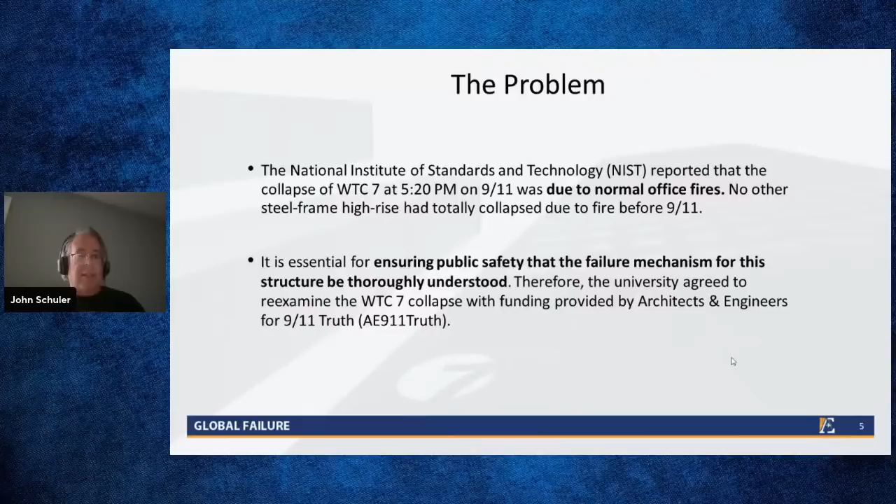So again, NIST reported WTC 7 collapsed due to normal office fires. This has never happened before in history. It's essential for public safety, as we engineers know, that this failure of this structure be thoroughly understood. Therefore, the university agreed to do this study funded by AE 911, but it's a complete, transparent university study.

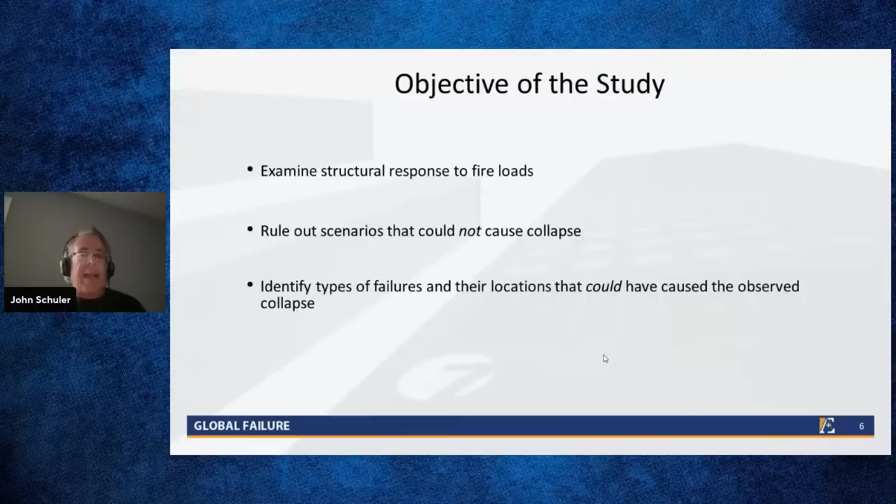Next please. So the 3 objectives of the study were to examine the structural response to fire loads, to rule out any scenarios that could not have caused the collapse, and to identify types of failures and their locations that could have caused the observed collapse. Next please.

So this study took 3 approaches. One, it simulated local structural responses to fire loading on floors 13 and below, where the fires were reported. Then we also looked at the collapse initiation hypothesis developed by NIST, this progressive collapse mechanism, as well as several others advanced by private engineering firms post 9/11.

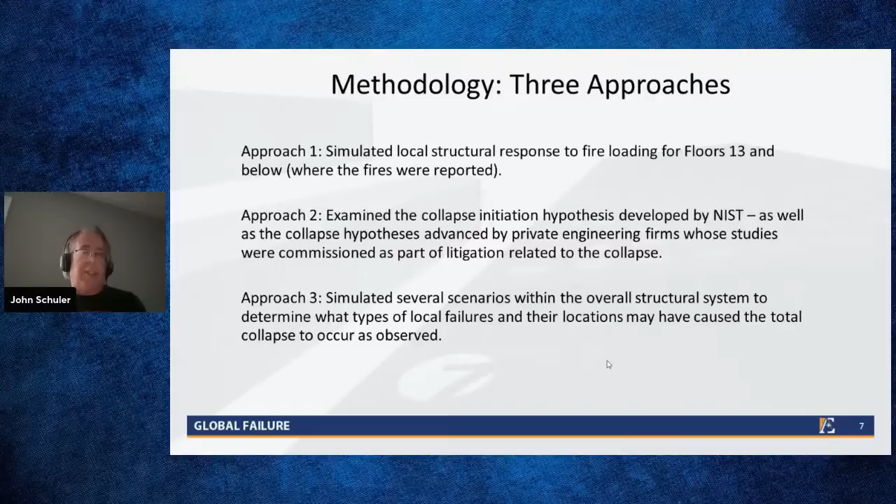And then the UAF study also looked at several simulated scenarios that would work with the recorded video footage to see if that would point to anything. Next slide please. And that's what we'll go through tonight.

So after 9/11, FEMA issued a report in May of 2002. Of course, the Federal Emergency Management Agency authored a report on World Trade Center 7. Then NIST completed its report in November of 2008.

Then, as a result of lawsuits, there were two other reports. So sometime around 2010, I guess, Con Edison sued the property owner of the World Trade Center complex, saying that our substation was destroyed because your building was faulty in design or construction. They went to court, and that was Silverstein Properties that they sued. And of course, in court, like many times, each side, the plaintiff and the defendant, each had their own engineering expert witness. For the plaintiffs, it was Arup Group, and for the defendants, it was Weidlinger Associates.

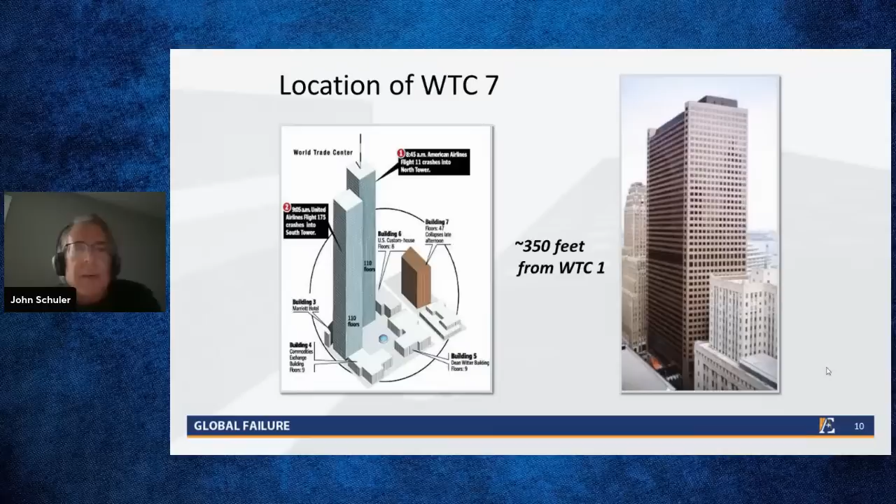Here's the location of World Trade Center 7. We all know there were the two twin towers. The World Trade Center was a complex of 7 buildings. 1 and 2 were the trade centers, 3 was a small Marriott hotel. Then there were buildings 4, 5, and 6, the other low buildings in the picture on the left. World Trade Center 7 was across the street, the furthest one away, and you can see a picture of it on the right-hand side.

World Trade Centers 1 and 2 were completed around 1973. World Trade Center 7 was not completed until 1984, so at the time of 9/11, it was only 17 years old—a new, beautiful building. It was 47 stories tall, and would have been the tallest building in 28 states, even though it looks small in Lower Manhattan. It was an irregular trapezoid in plan, 610 feet tall, 47 stories. The gross floor area was about 2 million square feet, about 75% of the Empire State Building, and it was built over and through an existing Con Ed substation.

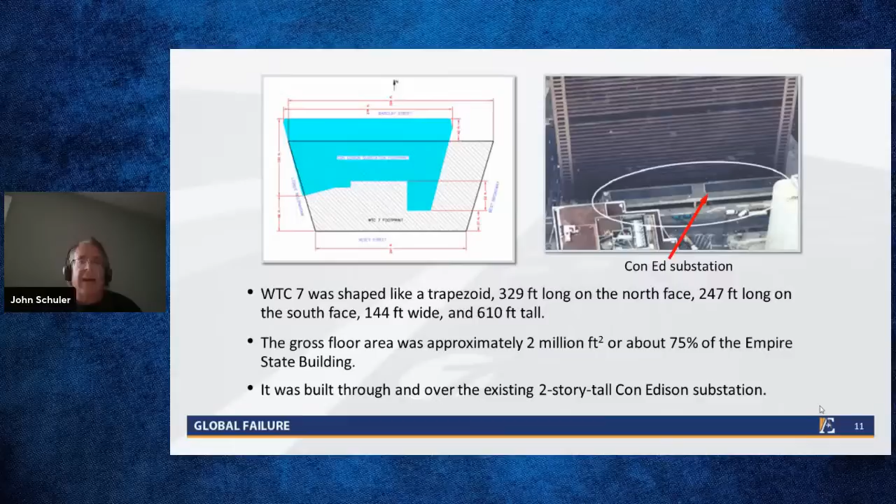Again, 47 stories, each floor was 1 acre in area. It housed a number of government offices for the federal government, I believe the IRS, FEMA. It was the control center for the New York City mayor's office and emergency authorities that day until it was evacuated and collapsed. There's a 10-story building shown for scale.

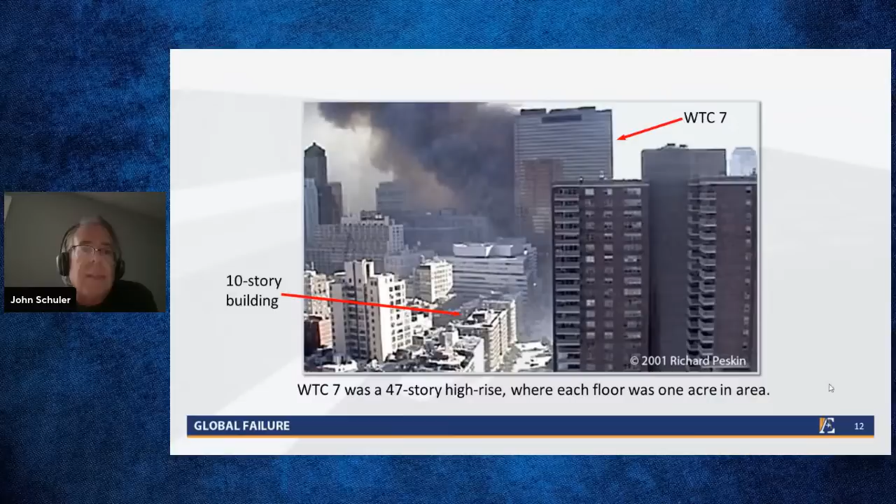Can we play this video here? This shows the collapse of the building, if anybody is not familiar with it or has not seen it.

This building fell into its own footprint in the matter of about 8 seconds or so, straight down into its own footprint. Even the commentators on the news commenting on this after the fact said it looked exactly like a controlled demolition. So this is how the building fell down at 5:20 p.m. on 9/11.

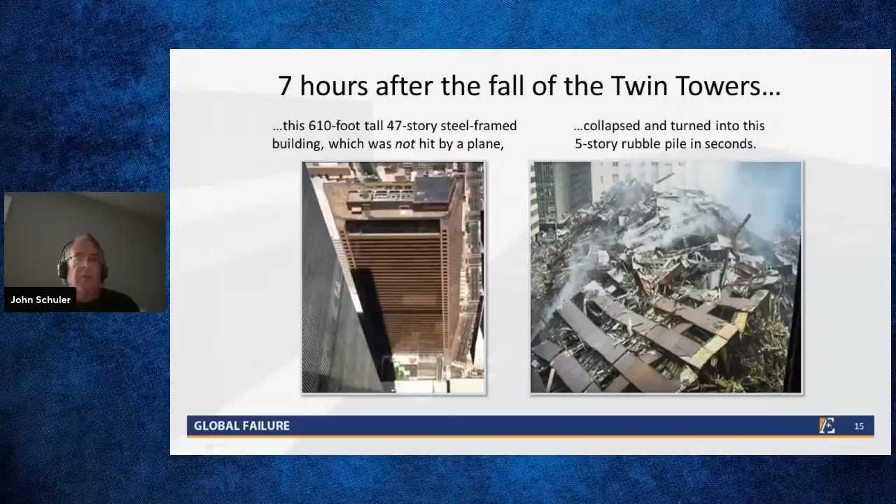This is what it went from—that beautiful building—to about a 5-story rubble pile in seconds. Steel frame building. Now, a lot of you might be familiar with the fact that the Twin Towers were of this tubular steel design, that innovative design that was a little bit different. This building 7 was not; it was a traditional steel frame building. It was not hit by an airplane—there was only some flaming debris that fell on it, as we'll look at next.

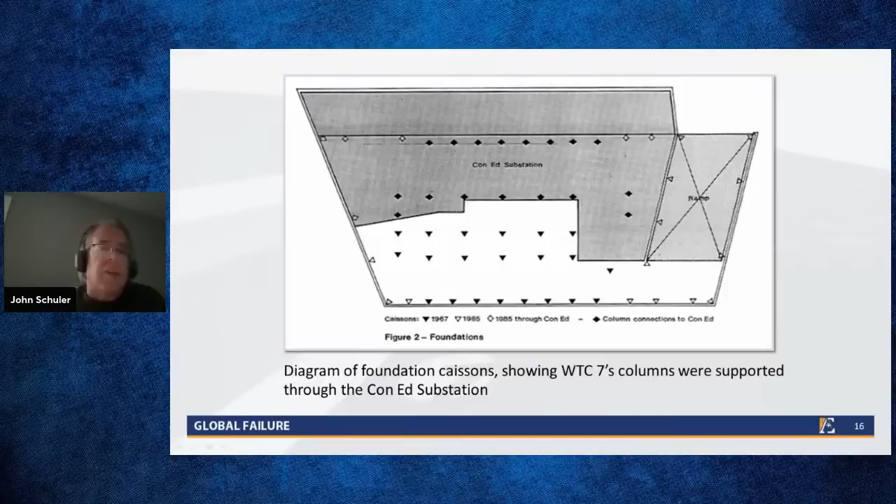Here's a diagram of the foundation caissons. Those diamonds show the caissons that went right through and over the substation, the Con Ed substation, showing there was support for the building directly through that substation.

Here's a floor plan of the building, with lots of framing. There were 82 columns in total, 58 around the perimeter and 24 in the central core. This picture is looking north, and west are the directions shown. So the south face is what faced the Twin Towers—they were 100 yards away across the street—so the southwest corner is closer to the Twin Towers.

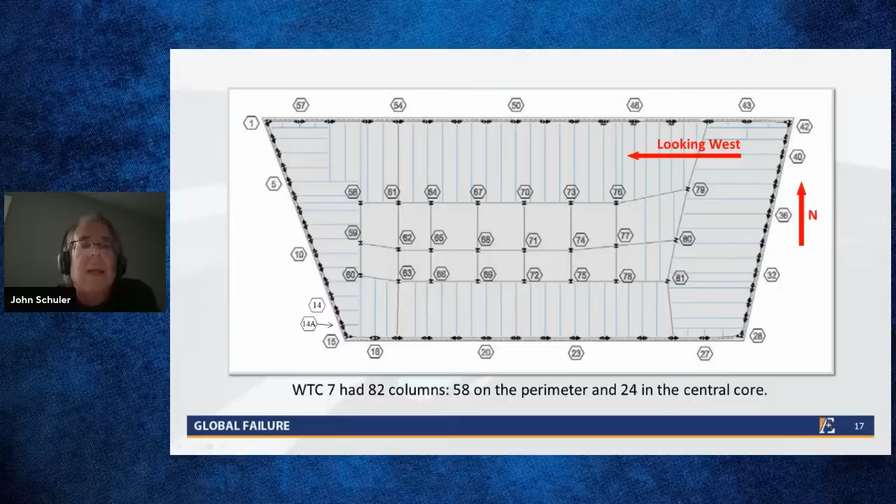In the northeast corner, the columns are labeled, and you'll see an interior column in the corner labeled column 79. That is the key column, that and the girders framing into it. That is where NIST starts its progressive collapse mechanism that we'll talk about.

Here's an actual construction photo, the interior looking out of the northeast corner. What you see—that first girder where we see the web—that is girder A2001, and column 79 is on the left of the picture. This is the important girder as well, with these floor beams framing into it.

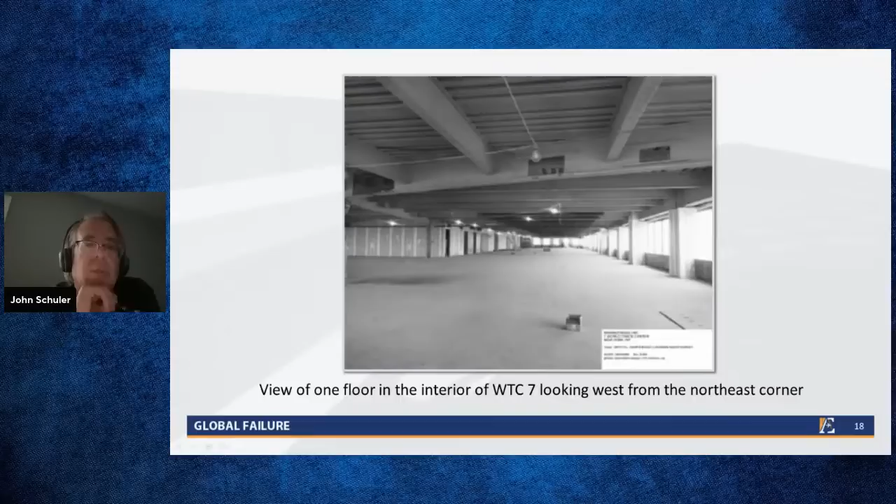Here's a view of the building under construction.

Again, this was World Trade Center 7, 350 feet away from the North Tower. It only suffered a small amount of damage from the tower's collapse.

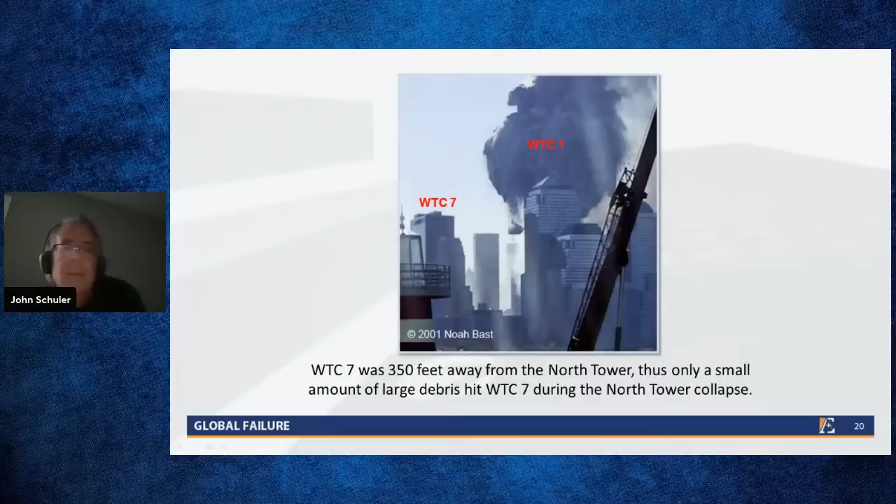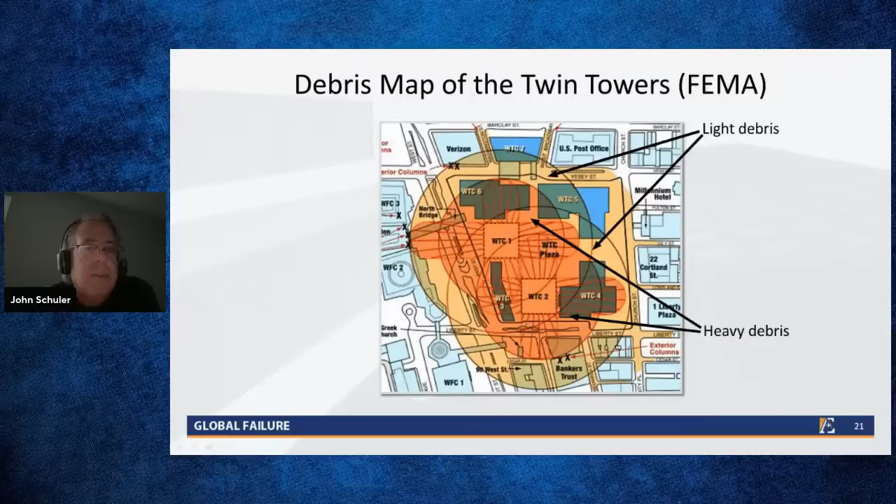Here's FEMA's debris map, and you can see the overlap with World Trade Center 7 is quite small. Again, we saw the spectacular fall of the Twin Towers, most of which came straight down into their footprint.

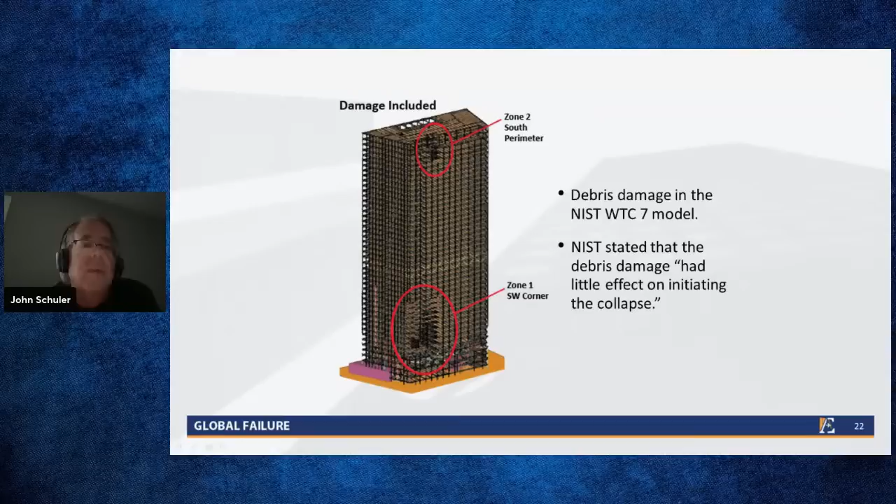According to NIST itself, the damage that World Trade Center 7 suffered from the collapse of the towers was minor and had little effect on initiating the collapse of the building. There were two areas of damage, in the southwest corner and on the south perimeter, not near where they said the collapse initiated.

A couple more pictures: this is the east wall of World Trade Center 7 on fire, and the north wall on fire. Both NIST and FEMA stated that the best hypothesis was these fires were caused by flaming debris that fell on them. There were diesel fuel tanks in the Con Ed substation on those first two floors, but both FEMA and NIST ruled those out as having had any impact on the fires in the building.

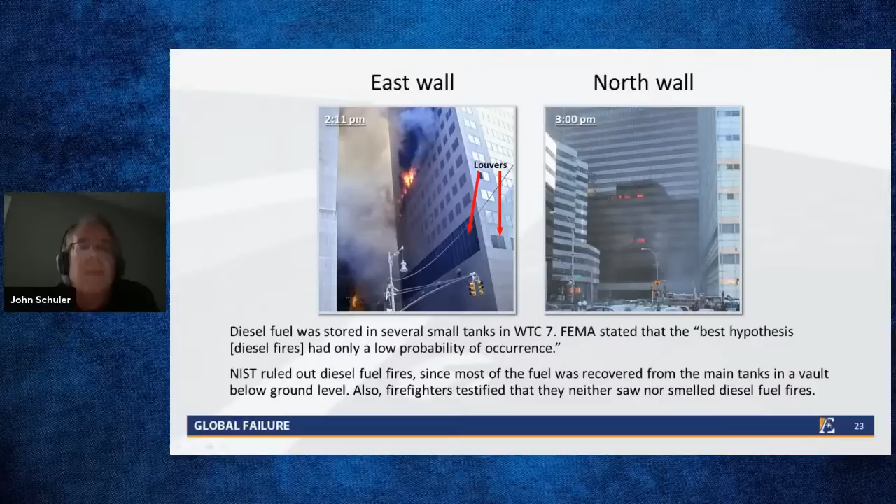NIST said there were fires on floors 7, 8, 9, 11, 12, 13, 19, 22, 29, and 30. The fires in the upper floors were not active after 1:30 p.m.

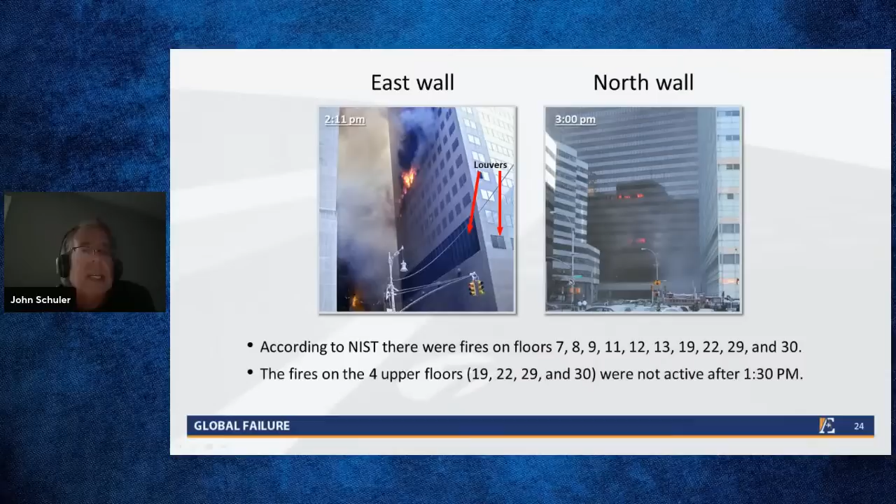There was a water tank on the ceiling of the building that operated the fire suppression system on those upper floors, and that was working. The fire suppression system to the lower floors was not working. Apparently a water main had been damaged when the towers collapsed. So fires in the upper floors were out pretty quickly.

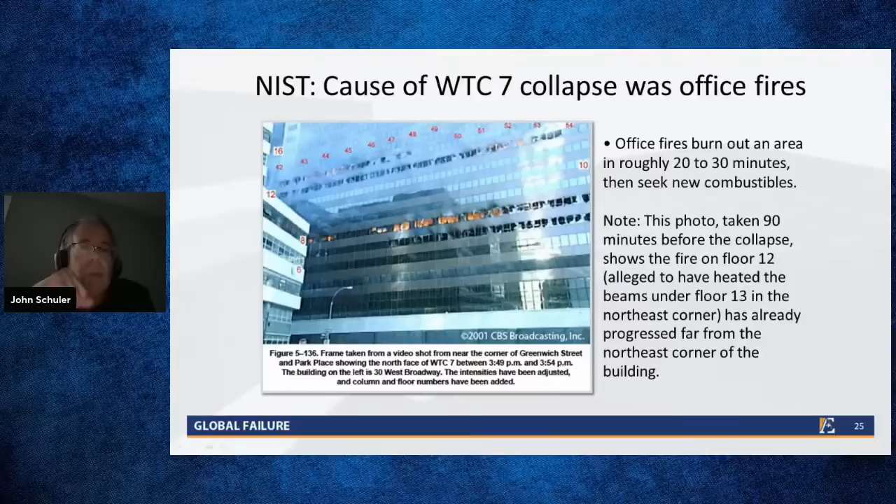Office fires typically burn through an area in 20 to 30 minutes and then seek new combustibles. Here we have a photo of Building 7 taken 90 minutes before its collapse, showing the fires on floor 12, which are alleged to have heated the beams under floor 13 that started this progressive collapse mechanism. They've already progressed away from that floor, far from the northeast corner of the building.

If you remember your Boy Scout knowledge, red smoky fires are cold fires, yellow smokeless fires are hot ones. So this was a very cold fire, essentially just office fires—no petroleum or anything like that involved.

So here's the essence of the NIST collapse theory, in 6 steps. First, thermal expansion on floor 13 because of the fires made those 5 beams, shown in red, expand. And therefore they pushed or pulled girder A2001, a horizontal member shown in red, off its seat at column 79. This all happened on the 13th floor.

When it came off its seat, that caused the girders between other columns on the 13th floor to fall off their seats. It allowed the floor to collapse and created a cascading collapse that also knocked beams on the lower 8 floors off of their seats.

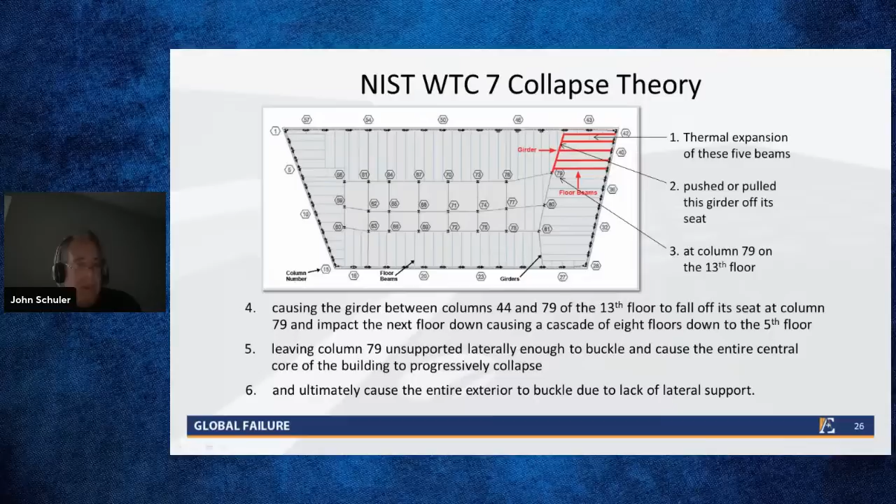That left column 79 unsupported for maybe about 8 or 9 stories, which therefore buckled. And when it buckled, it caused the columns around it to buckle, and then the building collapsed. That's the progressive collapse theory that NIST attributes to World Trade Center 7's collapse—the first time in history that would have happened.

So here is their explanation for it.

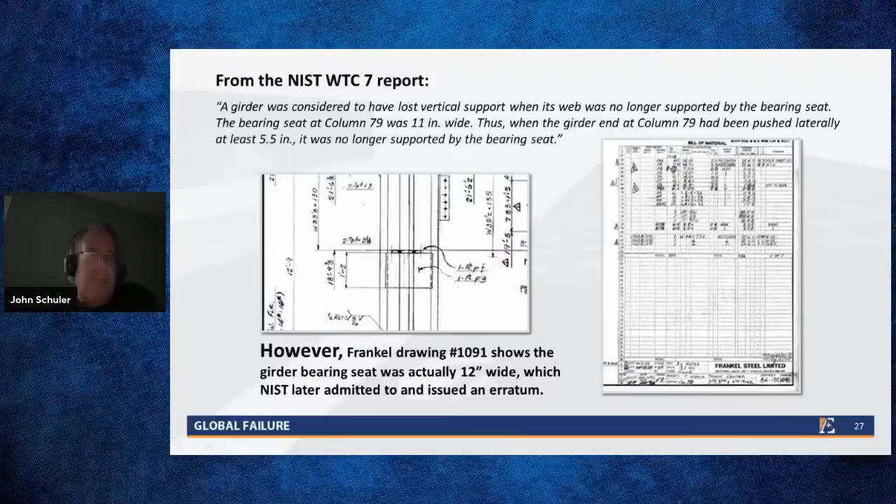However, Frankel, the design firm for World Trade Center 7, their drawings show that the girder seat was 12 inches wide. NIST initially said that girder A2001 was pushed 5.5 inches, and when its center of mass, with a damaged bottom flange, came off the seat, it was enough to let it drop. Architects and Engineers for 9/11 Truth later corrected them, pointing out that bearing seat was 12 inches wide, so that wouldn't have happened, for many other reasons as we'll see. But NIST said they agreed with us, saying, oh yeah, it's 12 inches wide, and then just said, by the way, it was pushed 6.25 inches, not 5.5 inches, but without correcting any calculations.

Again, this references Leroy Hulsey's report.

Okay, so we do have some common ground. AE 9/11 Truth and NIST agree on the material properties utilized in the study: steel, ASTM A36 or A572, typical values for steel. If you're engineers, you're familiar with these. If not, it's a lot of technical jargon, but all of the typical steel and concrete values we agreed on, as far as thermal expansion capabilities, modulus, strength, things like that.

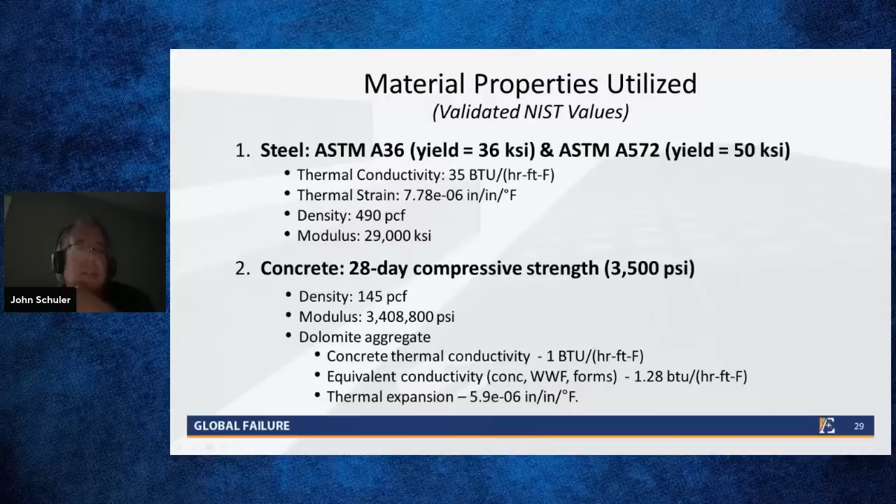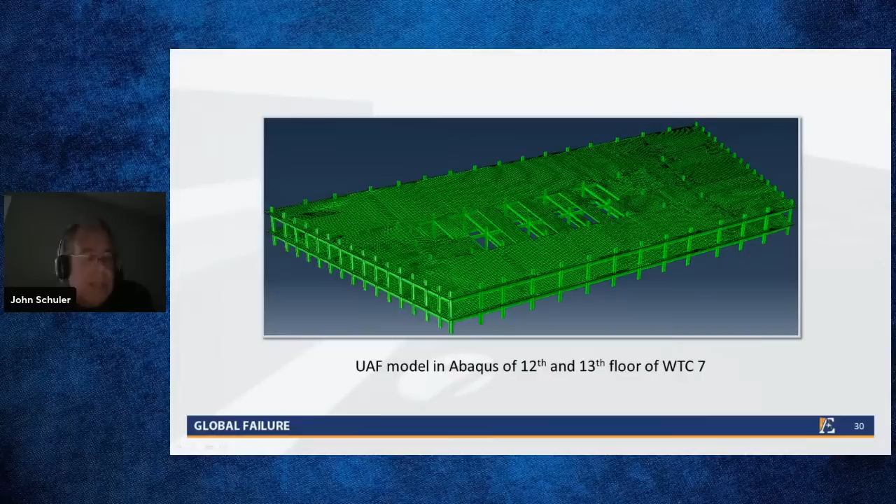Here's an Abaqus model from the UAF study on what floors 12 and 13 look like in the model. Very detailed study. The UAF study, the two graduate students used two computer models, finite element models, very popular, commercially available, powerful programs, Abaqus and SAP or SAP 2000. Both came up with the same results in the study.

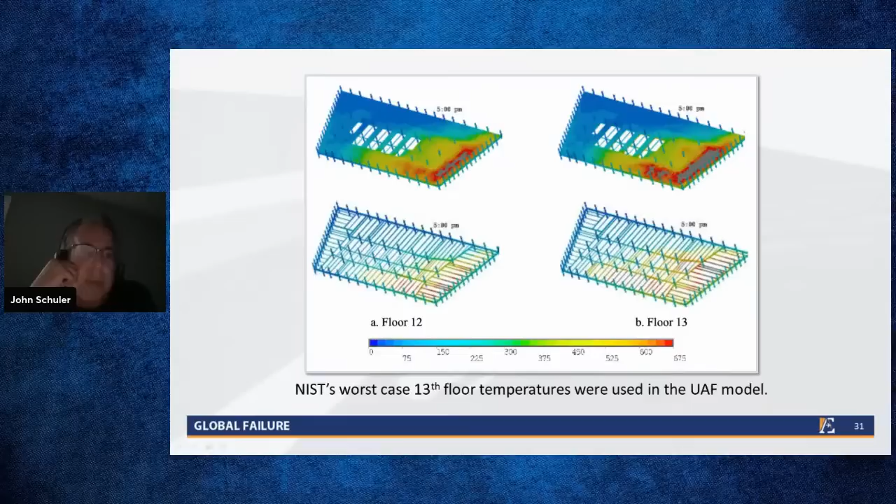Okay, so we didn't even argue with NIST temperature models, although it's since been found that those were probably, or definitely, high temperatures that did not occur according to what office fires could do. But these went up to about 650 degrees Celsius, and you can see where the hot spots are from where they said the fires were. So we went with that.

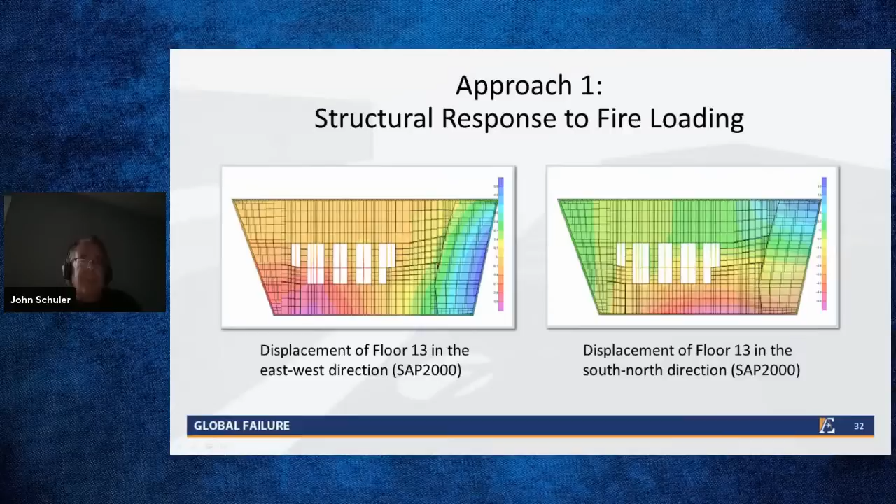Okay, so what the UAF study also found, the SAP 2000 analysis, was that the maximum displacement was only 2 inches of this floor. It was only 2 inches at column 79, not 6 or 5.5 or 6.5 inches, what their claim was. And similarly in the Y direction, very little displacement. Again, the displacement happened in the easterly direction because that wall should not have been fixed. It wouldn't have happened in the westerly direction, as NIST stated.

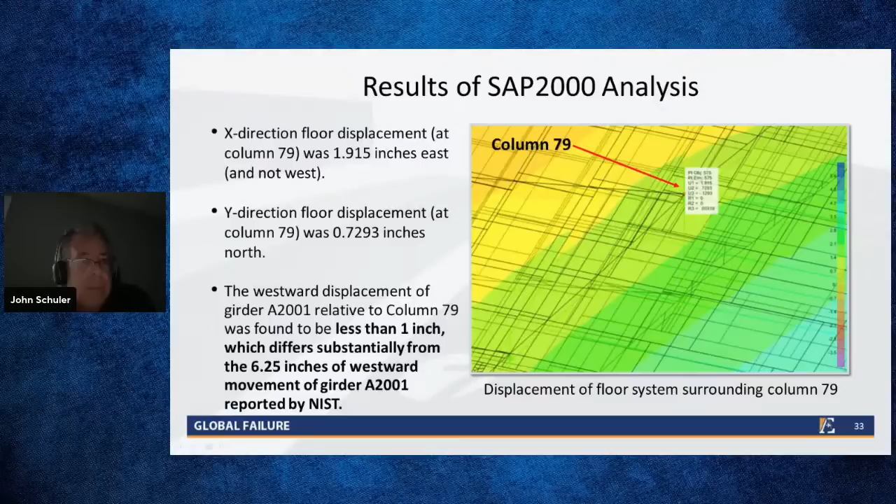Okay, so with a total deformation to the west of only 1 inch, A2001 would not have walked off its bearing seat, which was seen in the as-built and construction drawings and in photographs. So that was the start of the progressive collapse mechanism, and it could not have occurred for that one reason: not enough thermal displacement to push it off its seat.

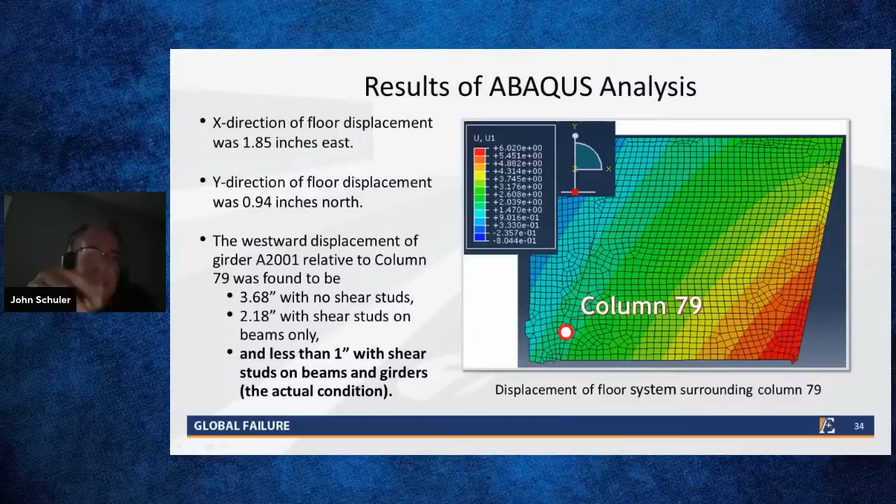Okay, here's the ABAQUS program result from the UAF study. It got similar results, slightly different, a couple tenths of an inch off, but again, 2 inch, 1 inch deformation, not 5 or 6 inches. And we also, in the AE 9/11 Truth model, the UAF study modeled in a couple different ways, with and without shear studs on the girder into the concrete floor above it. Still didn't make enough difference to push the beam off its seat.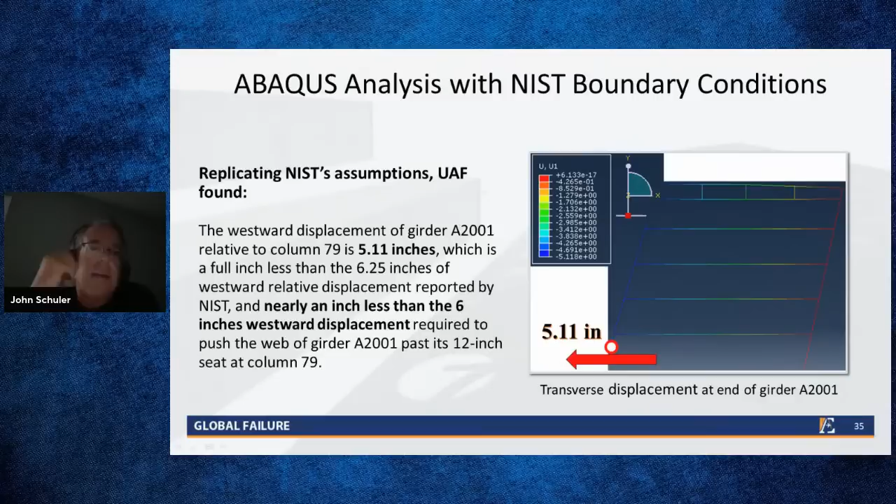Okay, now if we use the NIST boundary conditions in the ABAQUS model in the UAF study, with that exterior wall being fixed, we still only get 5.11 inches of displacement, still not enough to push it off its seat. So we're looking at all these angles.

Okay, so again, the ABAQUS model, that's what it looked like, but it's not going to be enough to push the beam girder A2001 off its seat.

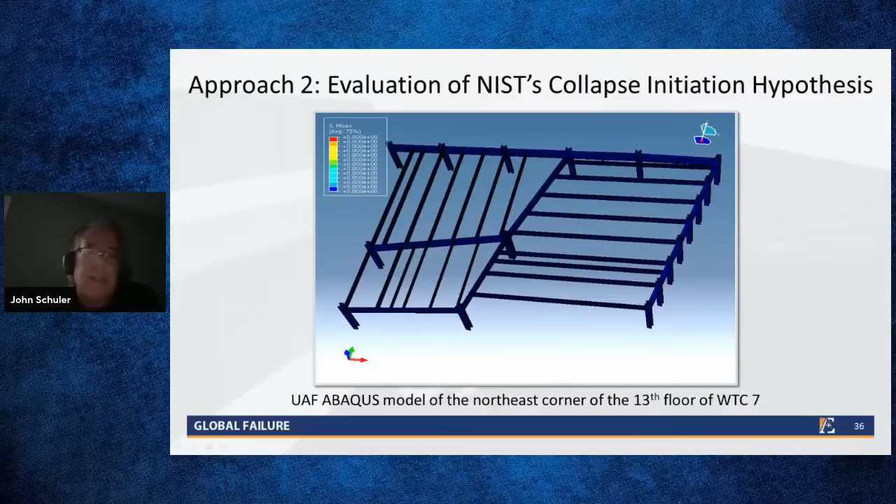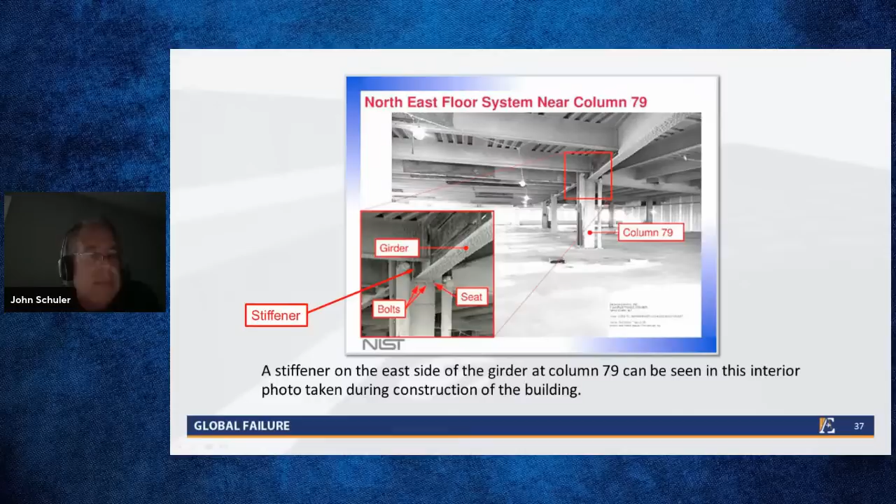Okay, and here are the construction pictures when the building was under construction. You can see this is column 79 that we're looking at, and it's called out. So that girder framing into it, shown in the inset, that's girder A2001 that NIST said walked off its bearing seat, which you can see is bolted to the column, column 79 underneath it, and there are stiffeners, even flange stiffeners, seen in the photo.

Okay, now here's a little bit about column 79. This is one beefy column. It's a W14 by 730 standard structural shape. If you're not familiar with what that means, it's an I-beam type shape stood on its end, and the end section would be about 22 inches wide by 18 inches long, and the web and flanges are so thick that 730 is its weight per linear foot. So every linear foot of that column weighed 730 pounds. That means there's more than 1 cubic foot of steel, about 1.5 cubic feet of steel in every linear foot. So, beefy column.

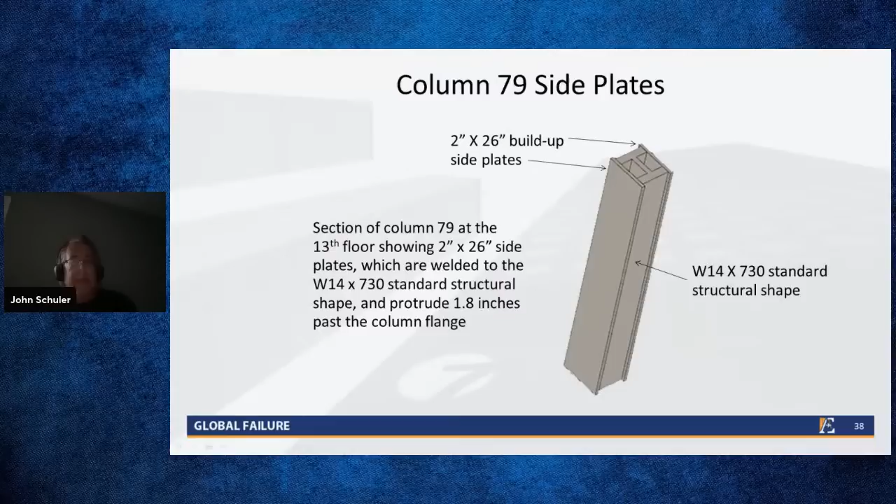In addition, you can see in the way this was constructed, side plates were welded onto this column for additional stiffness. These were 2 by 26 inch built up side plates. It's only about 22 inches deep, so these stuck out on each end by about 2 inches. These would have also prevented A2001, that girder, from walking off its seat, even if there could have been enough thermal energy to have done that. Next slide, please.

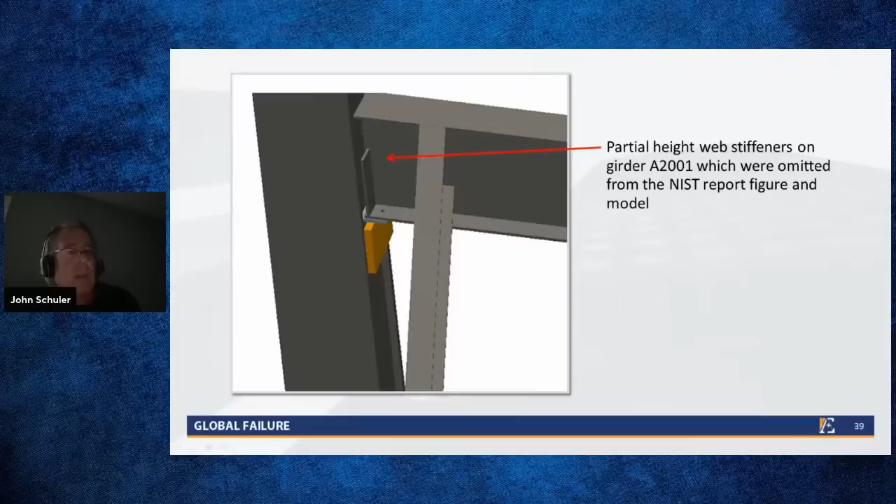Here's the finite element model of it, the diagram. So these partial height web stiffeners were in place, so they would have kept essentially the web and the flange at orthogonal angles, and that would not have allowed it to have walked off its seat, as NIST claimed. Okay, next slide, please.

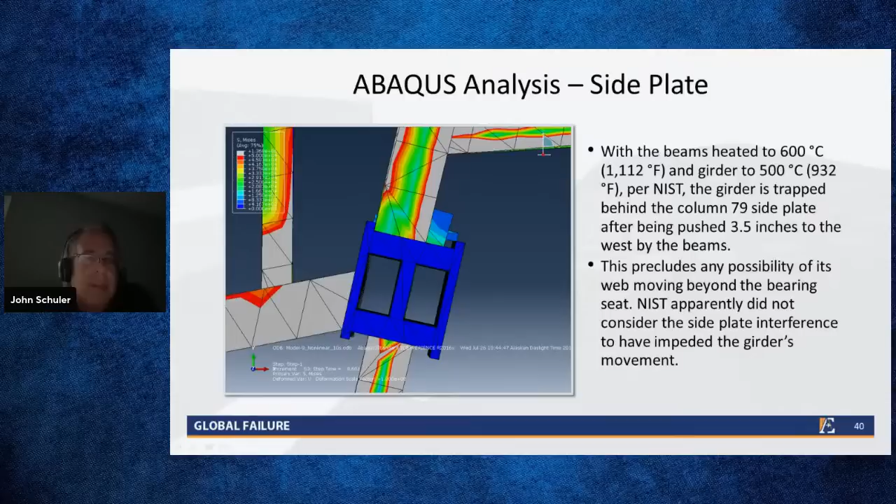So this is looking at column 79 in blue in the plan view. When the beams around it were heated to 600 degrees Celsius, using this value, the ABAQUS model shows that girder A2001, that we're looking down on, gets trapped behind those side plates. And that too could not have walked off its beam seat to start a progressive collapse. Next slide, please.

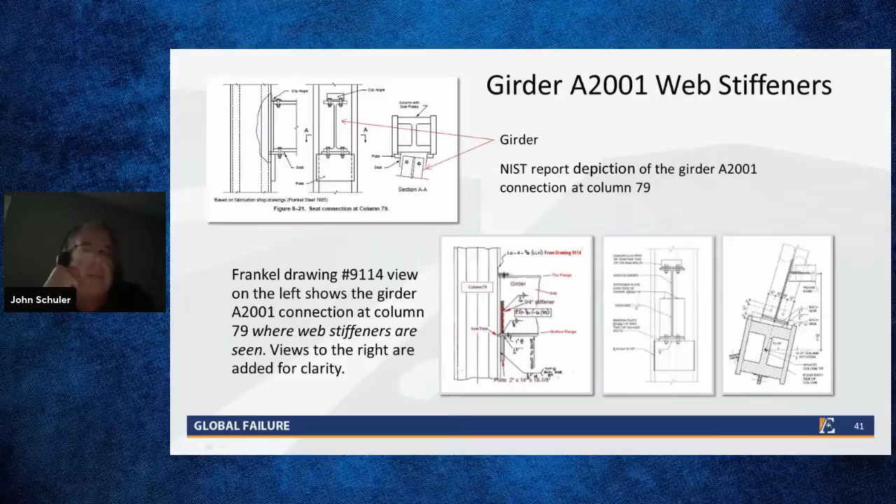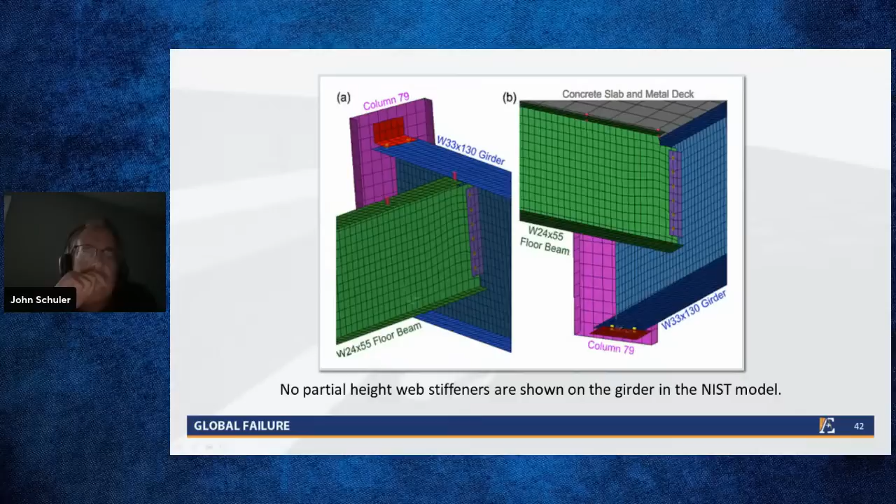And again, more from these, taken from NIST, the NIST finite element model out of their report, and they do not show those stiffeners in place. So they left those out. Next slide, please.

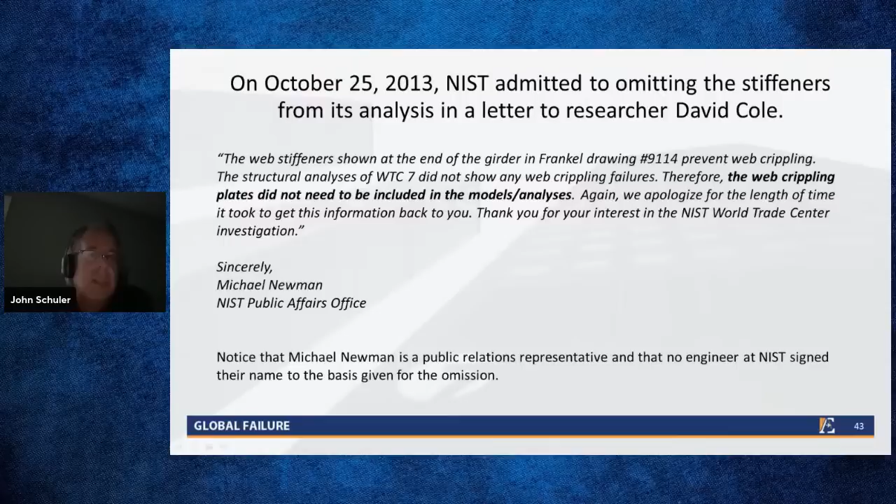Okay, and NIST admitted to omitting the stiffeners in a letter to a researcher. And they said the web crippling plates did not need to be included in the models or the analysis because their structural analysis did not show any web crippling. So they just left them out. But again, that data underlying their models is not available to anybody. The other interesting thing about this letter, it was not signed by an engineer. No engineers putting their name to this. This was signed by a public affairs person at NIST. Next slide, please.

Okay, in the ABAQUS analysis, with the stiffeners included, again, the web of girder A2001 could go beyond the bearing seat. No flange failure would occur because of the increased stiffness. So there's that in the side plates. There's 2 factors of safety against it walking off its seat. Next slide, please.

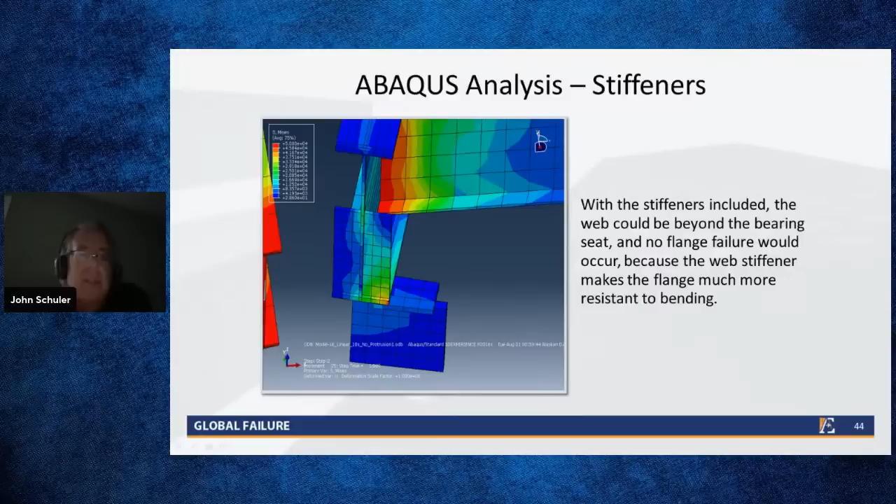Okay, now this is a picture of what NIST would have claimed happened. So this is a depiction of column 79, and those red circles go from floor 6 at the bottom to 13 at the top. Now 13 is where this started, where girder A2001 would have come off of it, walked off of its seat. And that would have allowed the floor, the corner of the building that floor it was supporting, to cascade down and crash onto a similar beam and girder seat below it. And their claim was that then crashed down another floor and so on down to floor 6. And when this happened, it left column 79 unsupported for enough length that it buckled and then caused other columns around it to buckle.

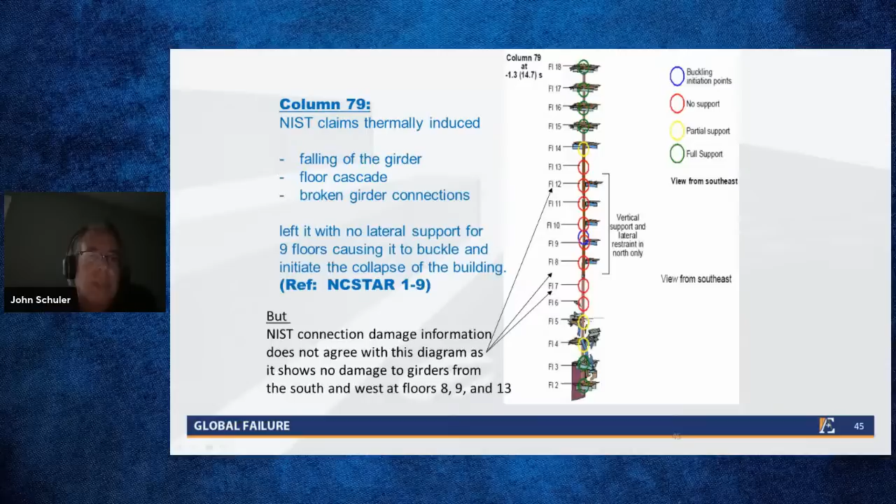Okay, however, the NIST connection damage information, even in their own report, does not show that there was a lack of orthogonal support on these floors. So that would be another argument that even in their own model, this would not have happened, where column 79 could have buckled. Next slide, please.

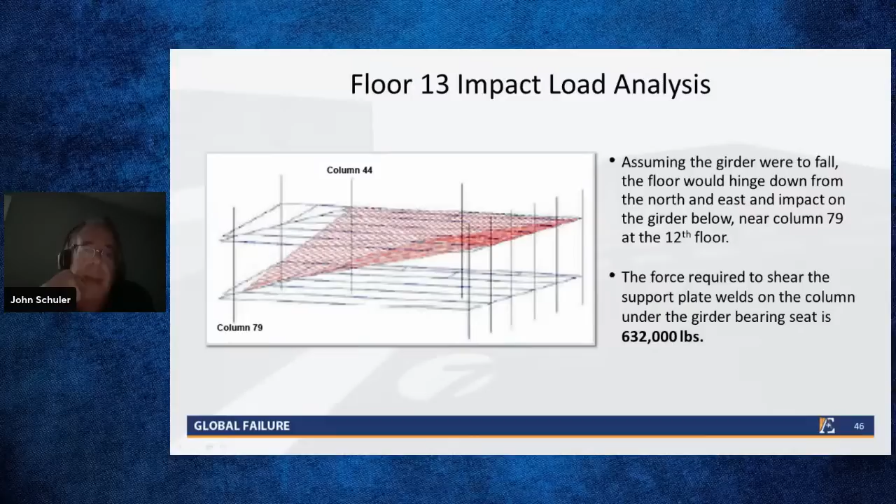Okay, and then there were some gross errors, we would say, in their computation of how much impact force was caused by these falling floor slabs. The UAF models show that the floors would have hinged down, that there were shear studs in these girders and beams going into the concrete above them, and they would have hinged down. Now, from some of the other reports that were published on this, the force required to shear the support plate welds on the columns under floor 13, as it cascaded down, on each floor that force would have been about 632,000 pounds required to shear that seat connection. Next slide, please.

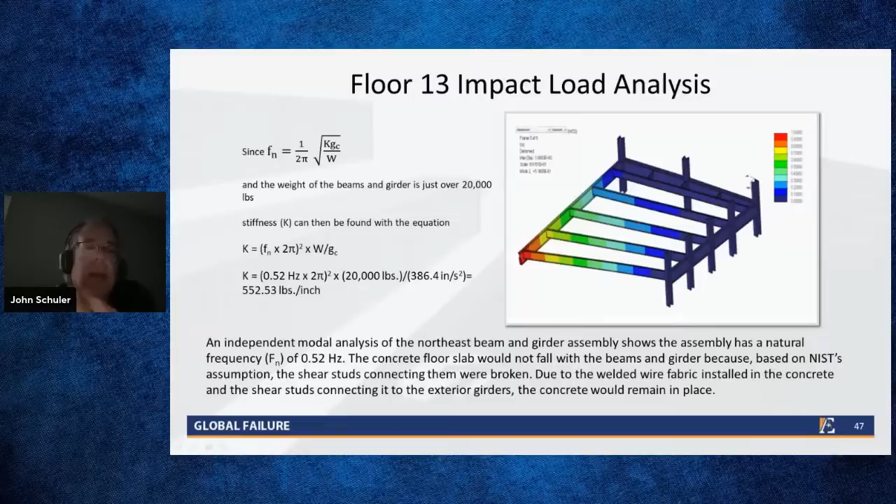And here, I won't go into the details on this, but in the impact load analysis, looking at the correct modal stiffnesses and whatnot, well, let's go to the next slide, please. You can see this was included in our finite element study.

Okay, next slide please. Just more calculations.

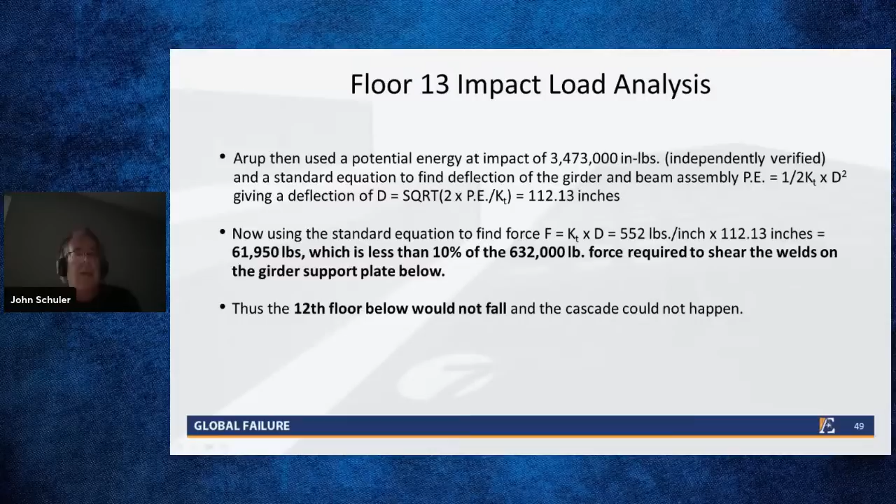Instead of 632,000 pounds of force required to break those connections, what we actually found was that there were only 61,950 pounds of force coming down into that corner from the hinging floor slabs above, and that's even at room temperature. If we allow for the reduced modulus of stiffness, it's even less, like 32,000 pounds. So you get about 10% of the required impact to shear those plates on each floor. That's another piece of evidence showing that next step in the progressive collapse mechanism could not have occurred. So the 12th floor would not have fallen for that cascading effect to happen.

Next slide please. Okay, and then, yeah, you can try to see if there's a video we can play. If not, we can skip through it.

So now we've looked at, yes, there were office fires. They did not heat the beams enough to make girder A2001 walk off its seat to begin a progressive collapse mechanism. There were numerous factors - the stiffeners, the side plates, the shear studs - all left out of this analysis, even though they were there, which also would have taken into account that the cascading floor impacts could not have happened.

A2001 could not have walked off its seat, so column 79 would not have buckled. It had to be a full 9 floors, from 13 to 6, that were exposed for that to have occurred. Even if several floors had cascaded and broken, it would still not be enough to buckle a sturdy column like that.

Next slide please. And next. Okay, now this was a video animation. Again, it's probably not going to work tonight with the technical difficulties. But on the left-hand side you see the actual video footage - many people took videos of this building collapse, the actual video footage of Building 7 collapsing.

On the right side is the NIST model. What you will see playing these two - and we can make this presentation available from AE 911, to anybody who likes, I believe it's on our website - is that their collapse model does not look anything like the video footage. They stop it after just a few seconds, and there's nothing more because it's not following the video footage.

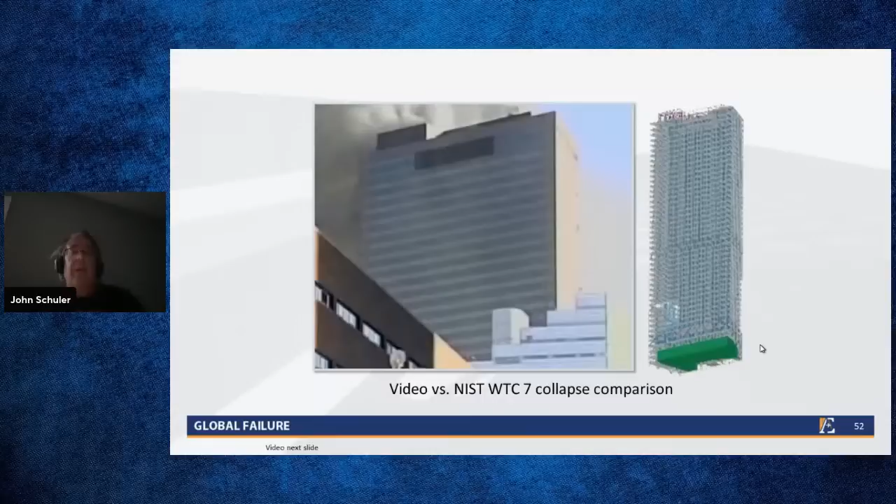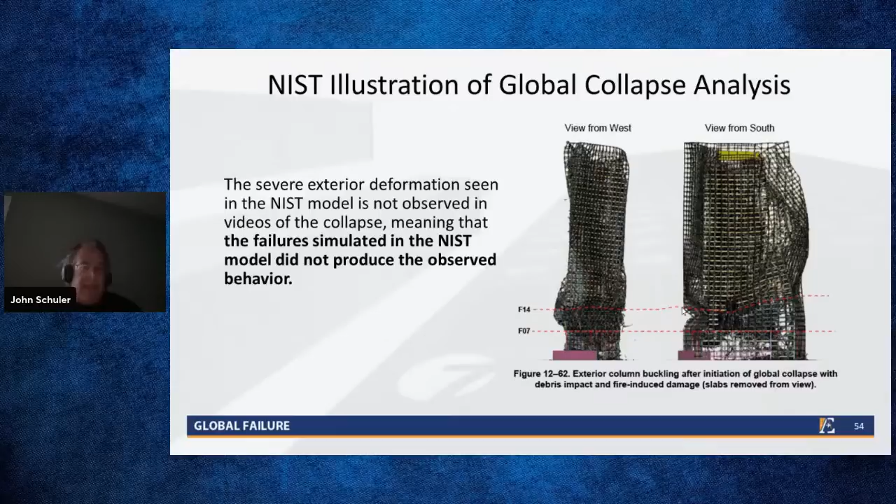Now what did happen, if you looked at the picture of the building - on the west side of the building there was a penthouse, and that's what fell first. After a few seconds you see the interior of the building collapsing, and then immediately the exterior, the whole building, and it all comes straight down into its own footprint. Next slide please. So this penthouse collapse -

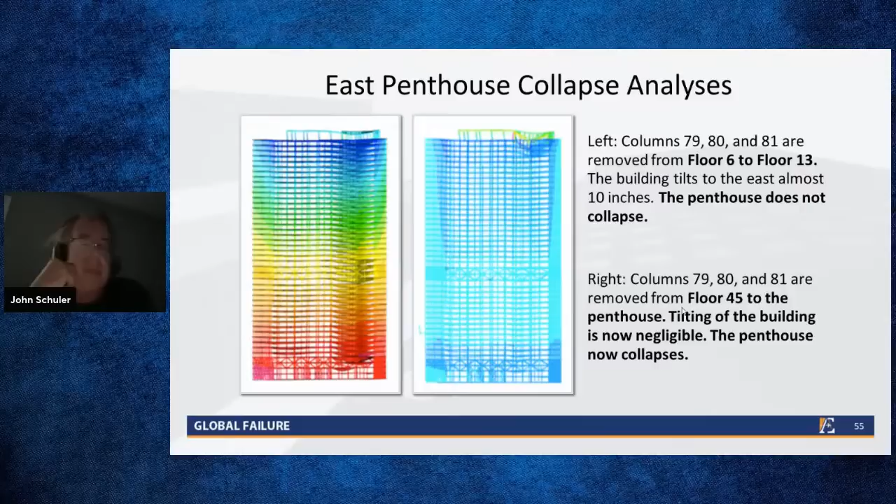Column 79 - what the UAF study looked at was to see, okay, even if columns 79, 80 and 81 were all removed for these 7 floors, what would that collapse have looked like? Well, the penthouse on the other side of the building does not collapse first, which is not what the video footage shows. However, if those 3 columns are removed from floor 45 up to 47, the penthouse does now collapse with negligible tilting of the building, which is what the video footage shows. Next slide please. And I'm sorry, that was the penthouse on the east side, not the west.

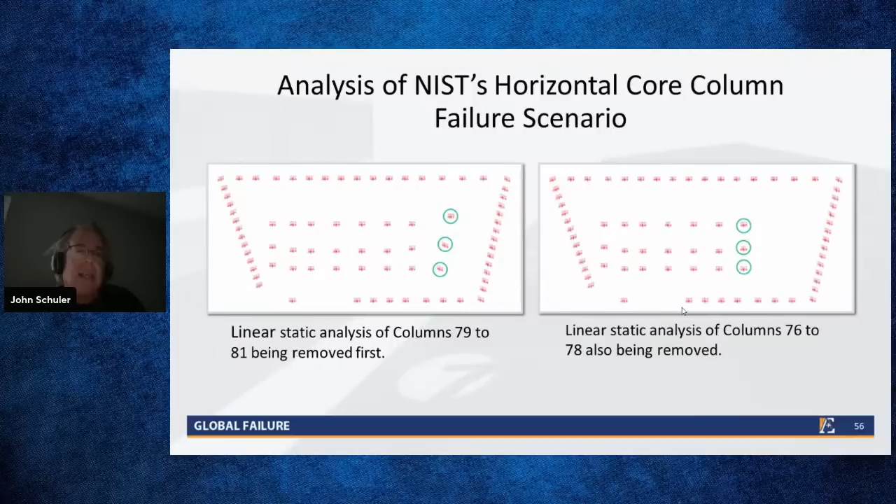Okay, so here's UAF analyzing this horizontal core column failure scenario. Just a brief picture to show this - we looked at collapsing columns 79, 80, and 81, there in green. If they all went down, what would happen? Next slide please.

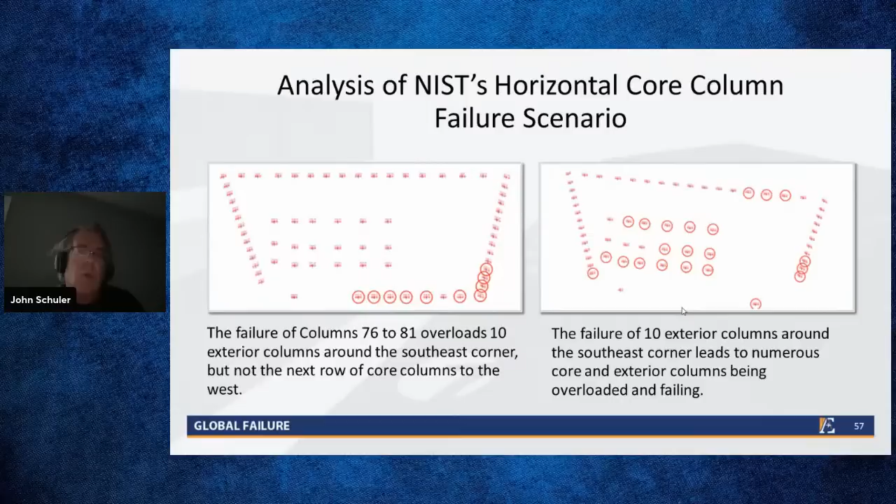Okay, and similarly, then we compared it to what would happen if corner columns in that lower corner were taken out. So we did these other scenario analyses to see what would best fit the observed failure of the building. Next slide please.

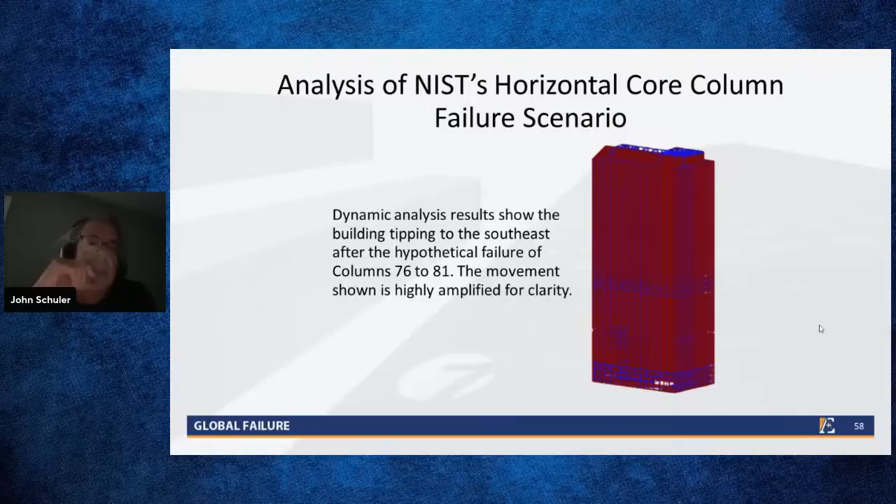Okay, and I don't think, again, we're going to be able to play the video, but the dynamic results show that NIST assumptions cannot validate what the video footage shows for the collapse. Next slide. And again, next please.

Simulation of the simultaneous failure of all core columns over 8 stories, in the UAF global collapse analysis, followed 1.3 seconds later by the simultaneous failure of all exterior columns, would produce what the video shows. That penthouse sticking up was the first thing to collapse.

There were different scenarios tried to make the collapse fit what the video footage shows, and then 7 seconds later total global collapse ensued. The only way to do that is to remove column support over 8 floors of the building.

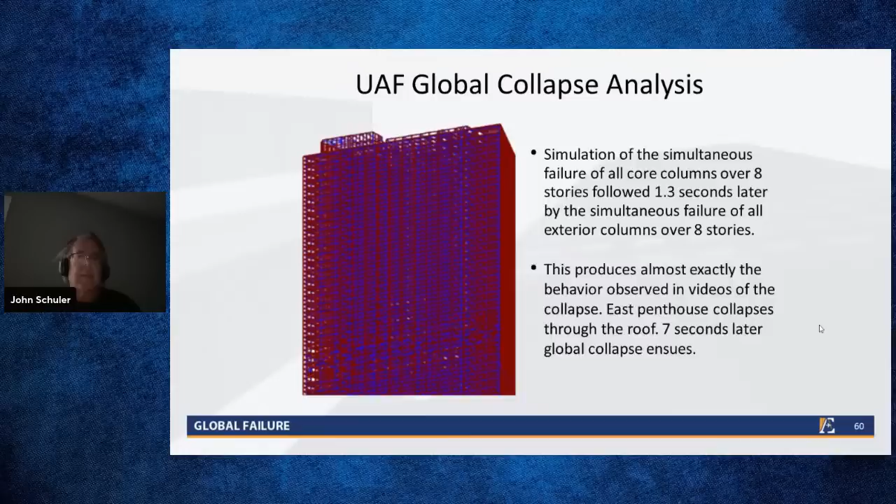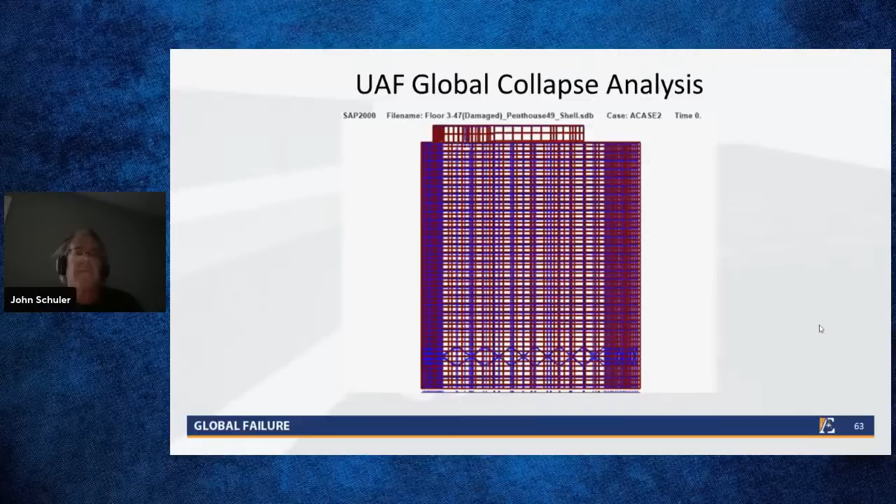This is very interesting - we talk about this building and the Twin Towers at times falling at free fall speed. This was originally pointed out with software by a physics teacher, tracing the video collapse on a screen and tracking its rate of fall. For about 2.5 seconds, or 8 stories, or 100 feet, World Trade Center 7 collapses at free fall acceleration, the acceleration of gravity. NIST was even forced to admit this in their final report released in November 2008.

They did not, however, say anything about its implications or change their model or their conclusion. But what this means, if it falls at free fall, is that there was no resistance offered over what would have been the equivalent of 8 stories of the building to anything falling on top of it. It was as if there was just air there, no resistance, as if the columns were cut. That's the only explanation, otherwise there would have been still residual buckling resistance from those columns.

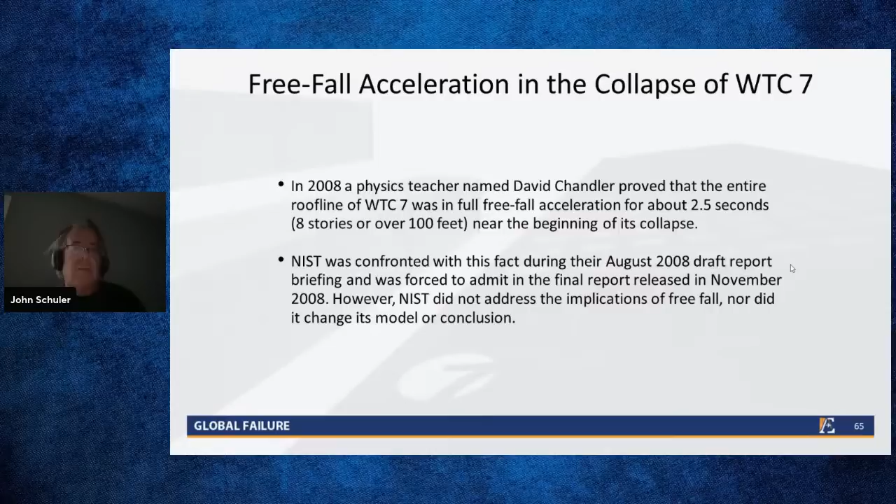Here's the video showing the video results demonstrating the free fall acceleration.

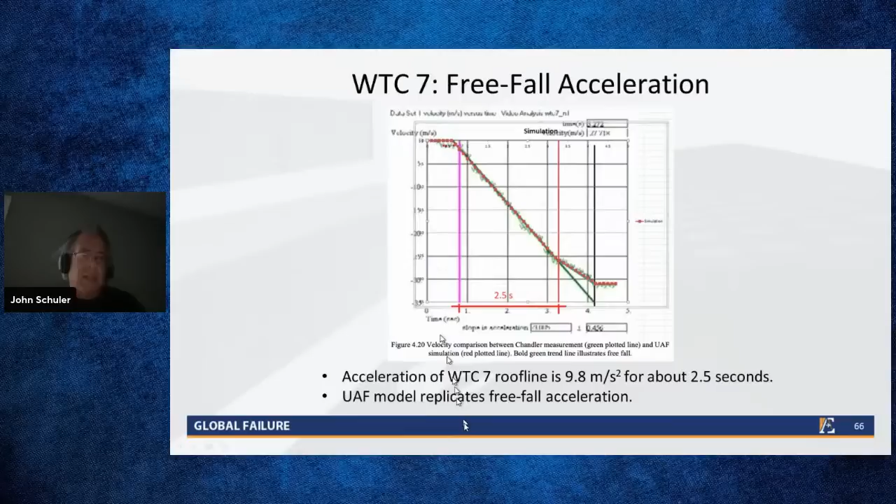This is a video software shown on the screen.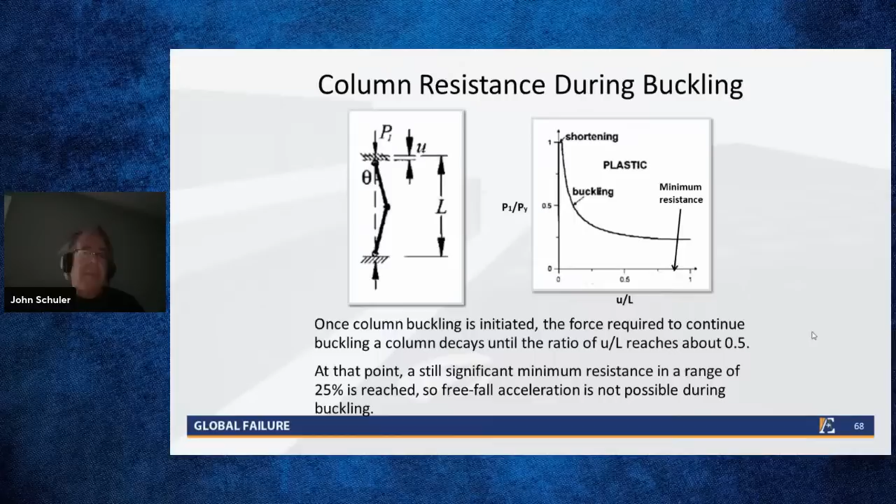That's another strike against NIST's assumptions, conclusions, and analysis.

This is a depiction showing that 8 stories somewhere in the lower part of the building would have been essentially non-existent, if you assume they happened down at the start of floor 13. That's the only way the building can go through free fall for 2.25 seconds. Also, the NIST model, their own model, never accelerates at free fall - that's another curious finding.

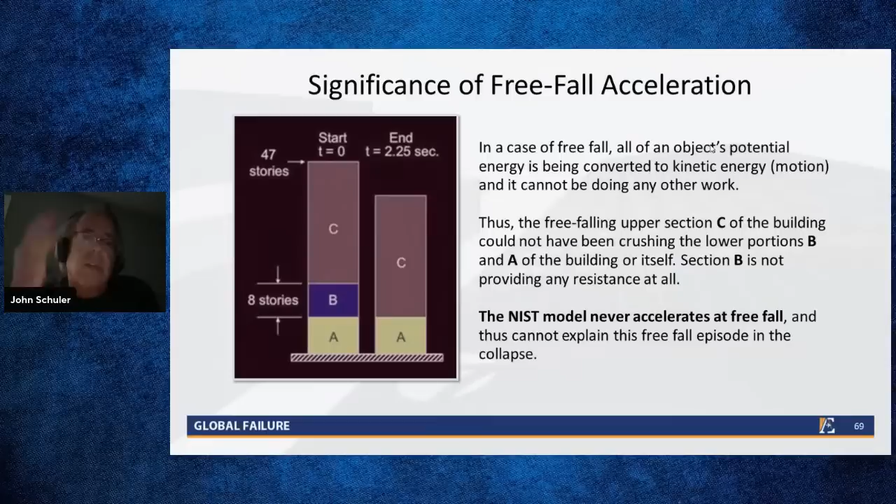Here's another finding. This is all assuming that there were office fires, which is all that we know of, and that they burned at around 600 degrees Celsius. However, there was a very limited metallurgical examination done of the steel of the collapsed towers after 9/11.

There were lots of pieces like this found with tremendous erosion just days after the collapse. This picture is one of them. This is evidence of a severe high temperature corrosion attack on the steel, including oxidation and sulfidation, and intergranular melting of the steel at a microscopic level. This shows that the fire had to have burned not a little hotter, but much hotter.

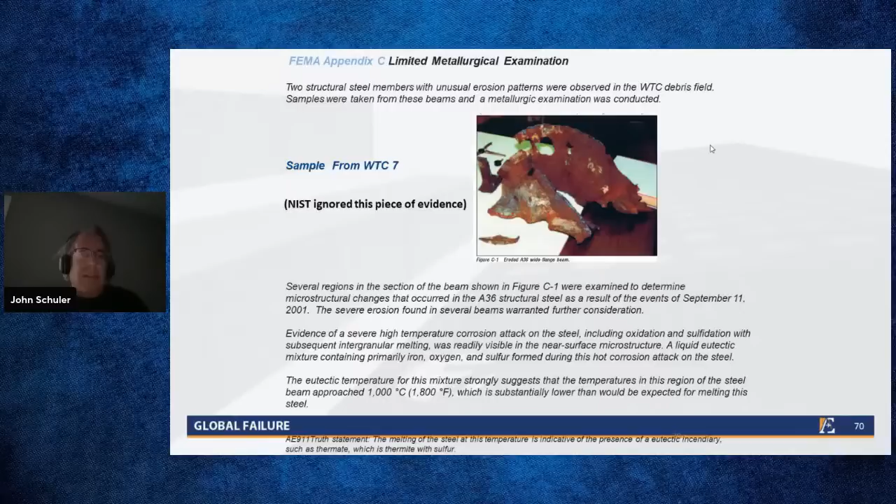One theory for that is the thermite or thermate theory, which many of you may have heard of - an artificially introduced material into the building, an explosive type material. Thermite is aluminum and iron oxide, essentially rust. It initially takes energy to get it going, and then it burns extremely hot. That seems to be evidence of what happened here.

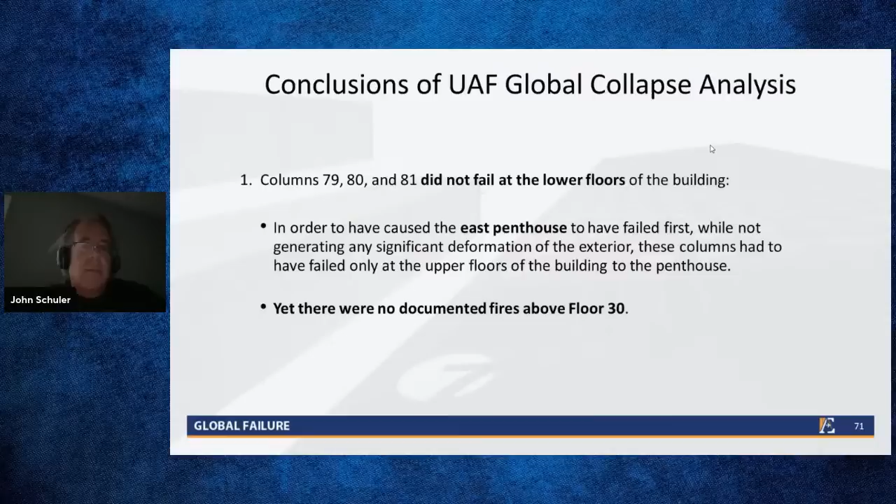So the hypothetical failure of columns 79, 80, and 81, the three most eastern core columns, would not trigger a horizontal progression of core column failures, which was NIST's hypothesis. It was also the hypothesis of Arup and Weidlinger, the two sides in that suit by Con Edison, that the buckling of column 79 would trigger progressive collapse.

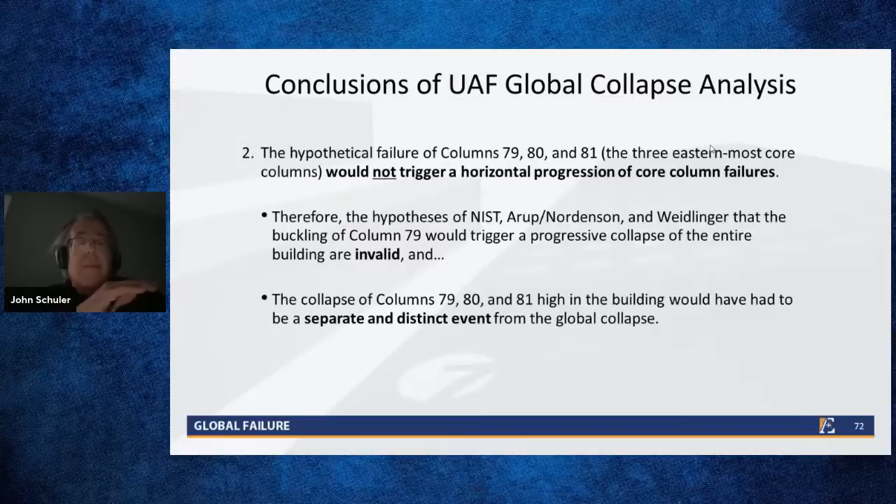These are all invalid assumptions proven by the UAF study. Again, extremely thorough study, peer-reviewed, publicly available, data models available, two finite element programs, Abaqus and SAP 2000, both used. The collapse of columns 79, 80, and 81, these critical columns, that high in the building, would have had to have been a separate and distinct event from the global collapse. They would have had to have come down first somehow to allow that penthouse to collapse. Next slide, please.

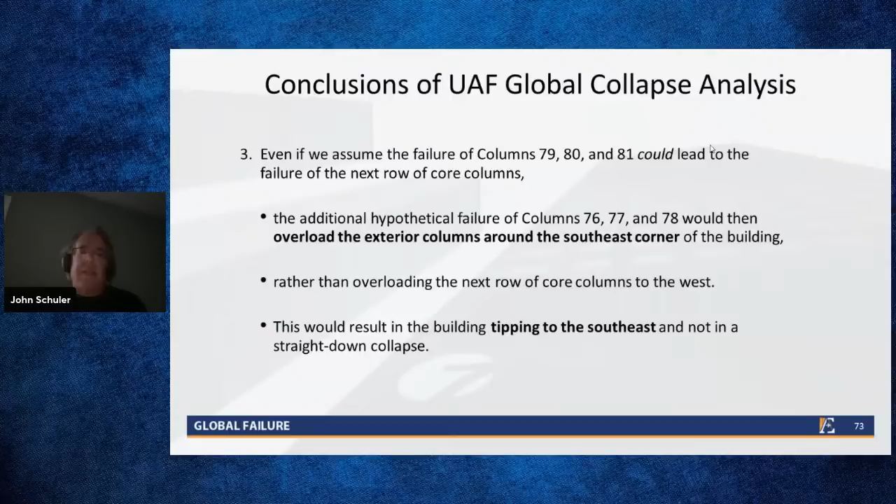Now, even if we assume the failure of those columns, that they did fail and could lead to the failure of the next row of core columns, the additional hypothetical failure of adjacent columns 76, 77, and 78 would then have overloaded exterior columns first. And then we would have seen the building tipping significantly to the southeast. It did not happen. It came straight down. Next slide, please.

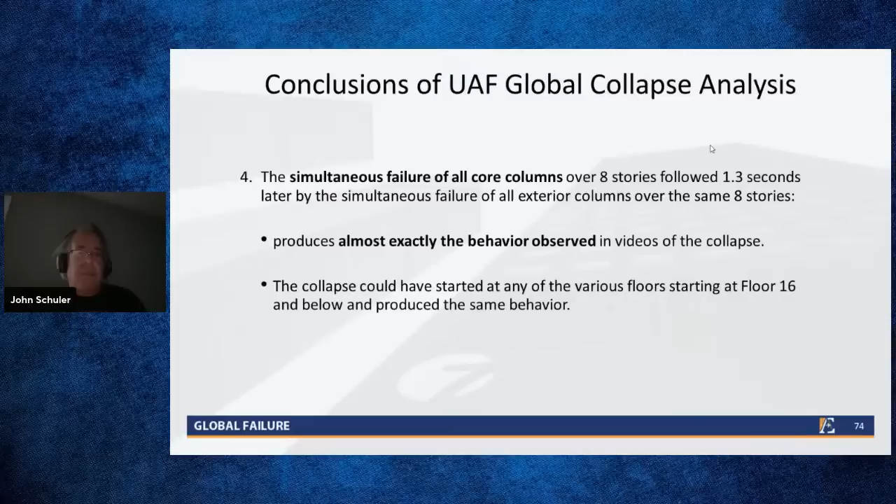Okay, so the simultaneous failure of all core columns over 8 stories, followed 1.3 seconds later by all the exterior column failures over that same 8 stories, does in fact produce almost exactly the behavior observed in the video collapse of the building. Now that collapse could have started at any of the various floors, starting at floor 16 or lower, to produce the same behavior. But that's the only mechanism that has been found so far to reproduce the collapse that we see in life. Next slide, please.

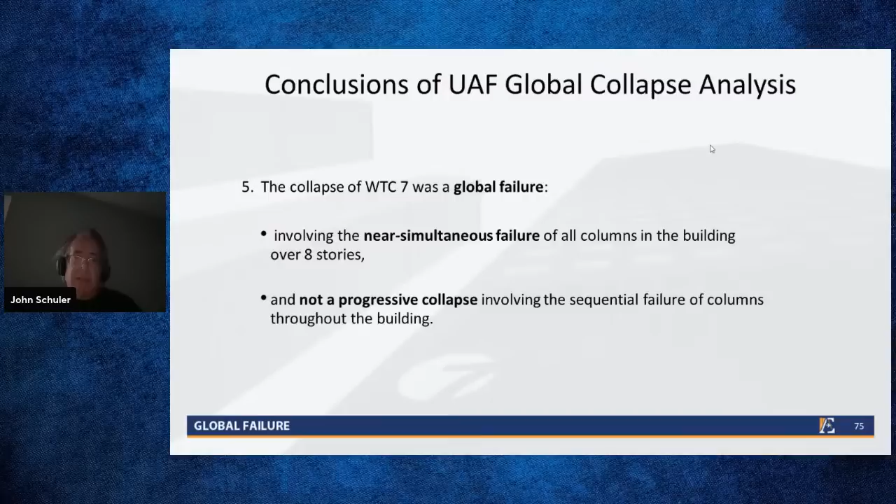So the conclusion of the UAF study is that World Trade Center 7 collapsed due to a global failure. It involved a near simultaneous failure of all the columns in the building - there were 58 perimeter and 24 interior columns, something like that, over the entire 8 stories. And there was not a progressive collapse mechanism involving a sequential failure of columns throughout the building. Next slide, please.

Okay, so despite trying a number of hypothetical scenarios, the UAF team was unable to identify any progressive sequence of failures that could have taken place on 9/11 that caused the total collapse of the building, much less the observed failure of a straight down into its own footprint collapse, with approximately 2.5 seconds of free fall and virtually no differential movement of the exterior as was observed in the video. Next slide.

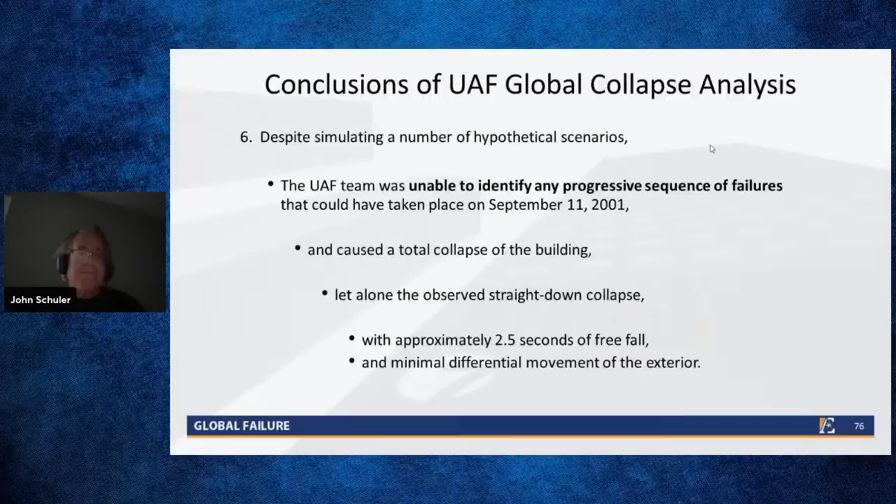Okay, so this is a big problem, certainly for the engineering community. Should be of concern to everybody, although most people are not aware of all these intricate issues. But what this means is that, almost 21 years after 9/11, we have no explanation other than what the UAF report shows and what people can hypothesize from that of how these buildings came down. All the columns must have had a simultaneous failure. How that happened, though, nobody has decided to look into.

We would like NIST to redo their report. We think it's required by the law and, of course, ethics - engineering ethics. So the ASCE, American Society of Civil Engineers Code of Ethics, has 6 canons that are relevant here. One is to hold public safety paramount. That's why we get our PE licenses. We know this.

We're still building high-rise buildings, skinnier than ever, as tall as ever. And the structural code, while there have been some changes to it since 9/11, nothing that would address progressive collapse by fire. So this is an issue for the engineering community.

Canon number 2, we're required to serve with competence. There has not been a competent soup to nuts analysis of how these columns could have all failed in a global catastrophic way they did.